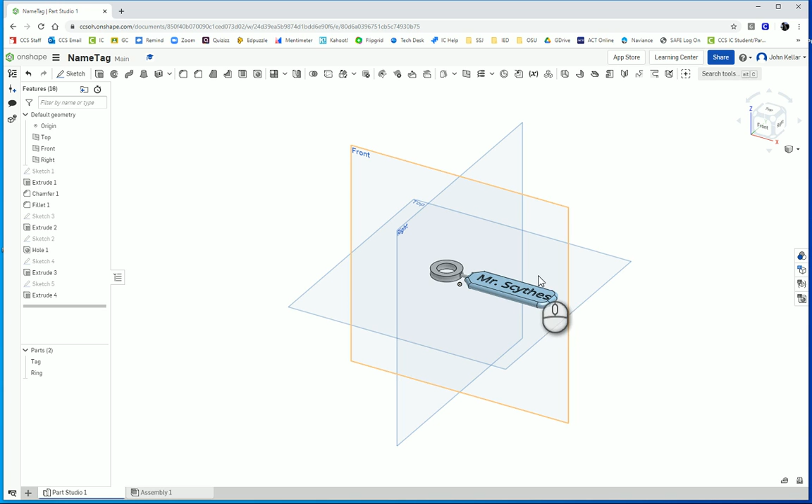Okay, we'd like to begin another episode of OnShape, and we're going to do a couple things in this nametag exercise. We're going to first learn how to do a feature fillet and a feature chamfer. We'll also learn how you can emboss or engrave text on a surface. And then we'll also learn how to use existing geometry on one part to design geometry for a separate part. And then finally, we'll also learn how to use the Revolute Mate to insert a cylinder into a hole.

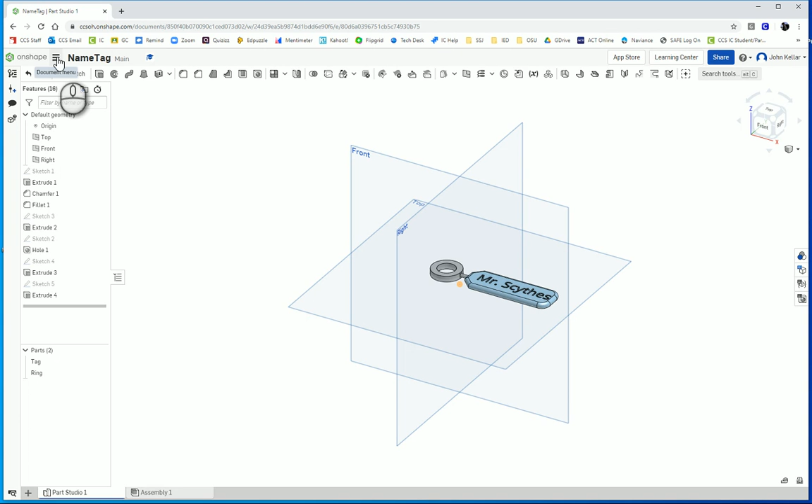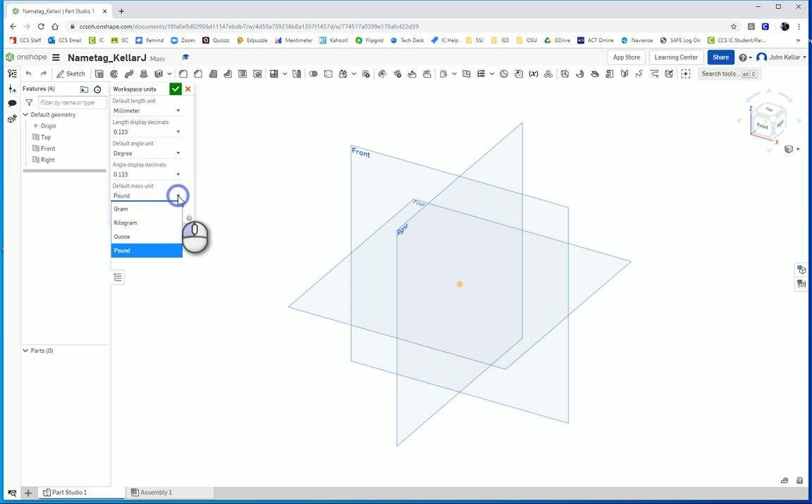So let's go to OnShape and go to your IED folder, and you're going to create a new document and call it Nametag underscore your last name, first initial. And since we're going to be working in millimeters, we should change our workspace units to millimeters. It's also helpful to change the mass units to match the same system, so grams or kilograms—this is a small piece, so grams are fine.

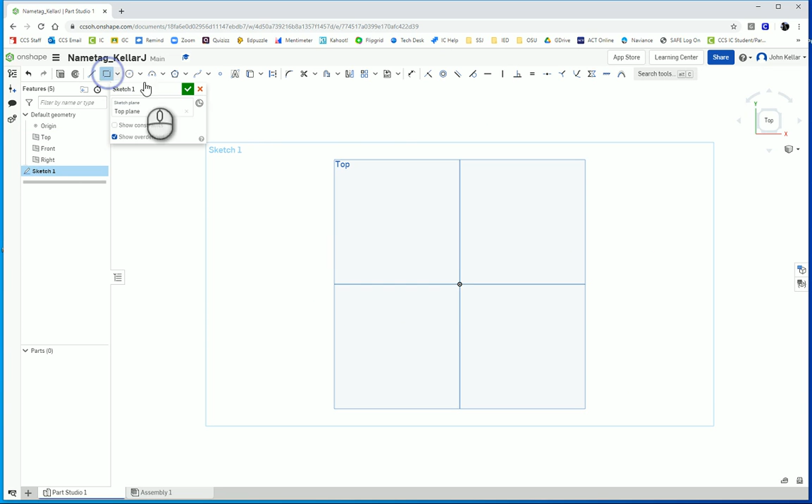Okay, so we are going to first start a sketch on the top plane. Now I'm going to use the default planes here a lot, so I'm going to click on the top plane here, and then I want to look straight at it. I'm going to grab a corner rectangle, attach it to the origin, and drag it up somewhere and click. Then we want 60 width, enter, 20 height. Okay, so there's our starting part.

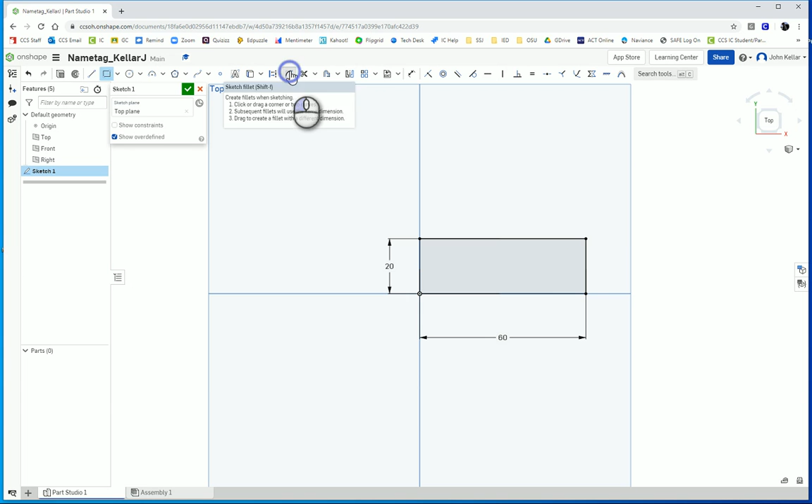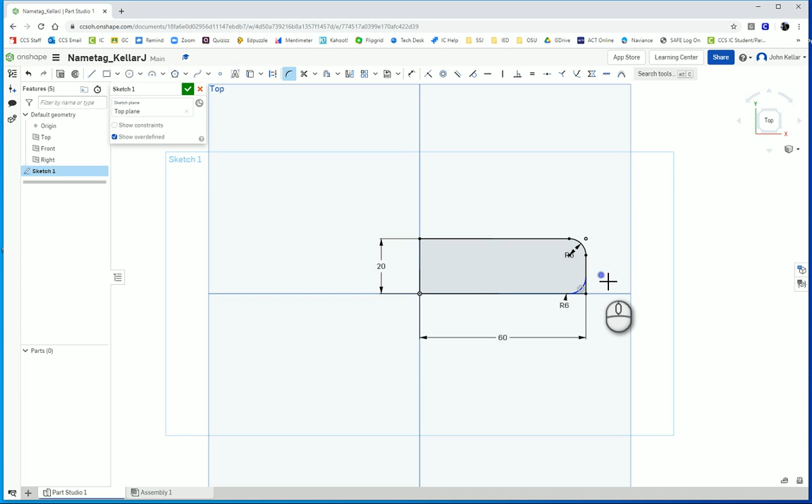The next step is we want to round off the two right side edges with a sketch fillet, which is right here next to the scissors. Click on the sketch fillet, and then I can highlight the point where that corner is. Click on that, and it applies it. It gives you a preview, and you click again to change the dimension, which is 6. Then the corner just below that—click again, and notice it uses the same dimension as you used on the previous one. So click and enter, and there's our fillet.

All right, finish that sketch, and now we need to extrude it. Okay, now I'm going to take a quick look from the side over here. You'll see why shortly.

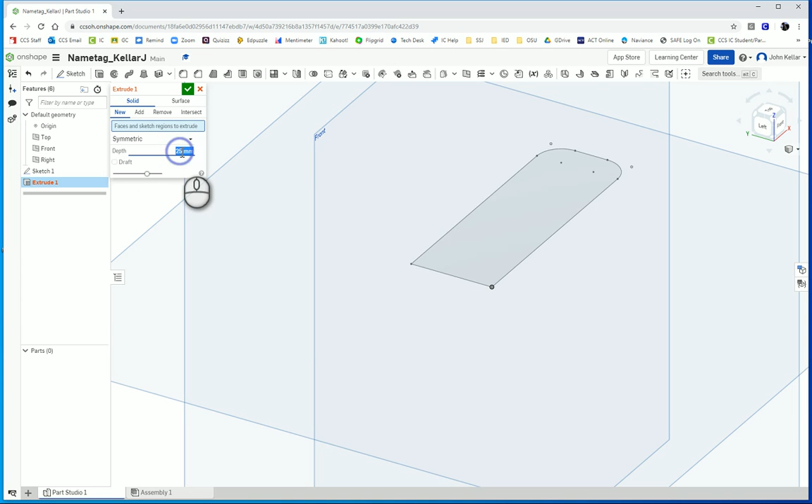We're going to do a symmetric extrude. Okay, this extrudes it above and below the plane. So 4 millimeters, and click on our sketch. Notice it extrudes half of that above and half of the 4 below. That's going to be important later on. Symmetric sketches are nice when you need a midline through showing through your part for later placement of geometry. Finish the sketch.

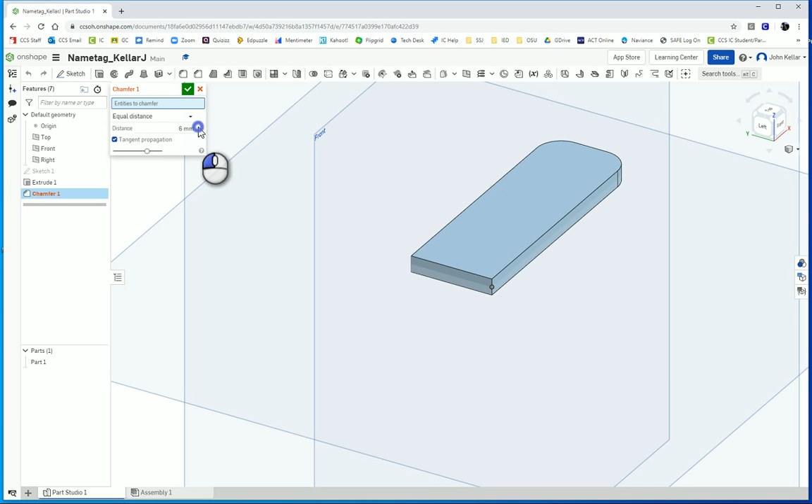Okay, so now we're looking at this side. Now the next step is we want to see how these corners here meet at 90-degree angles. That's kind of sharp. I'd like to shave those off with a chamfer. So I'm going to do a feature chamfer up here. Click on that, and I want equal distance, 6 millimeters. Then I just select this left edge—notice I highlight not the whole side, I want the left edge—and the right edge here. Notice it shaves them off. And green check mark.

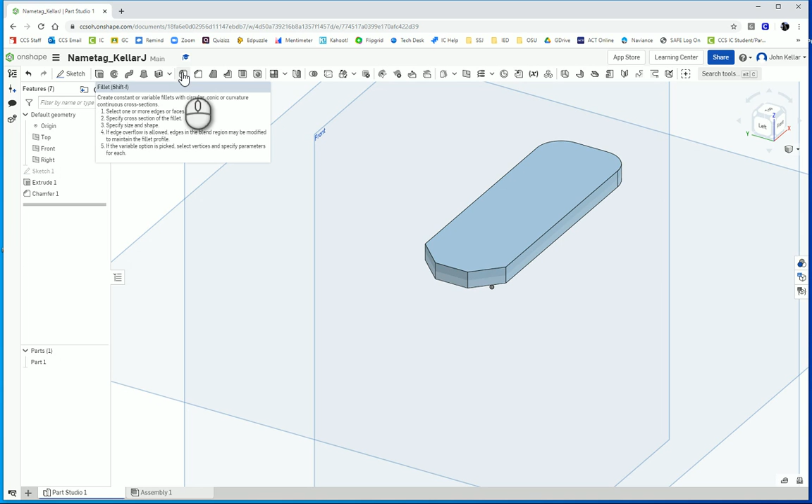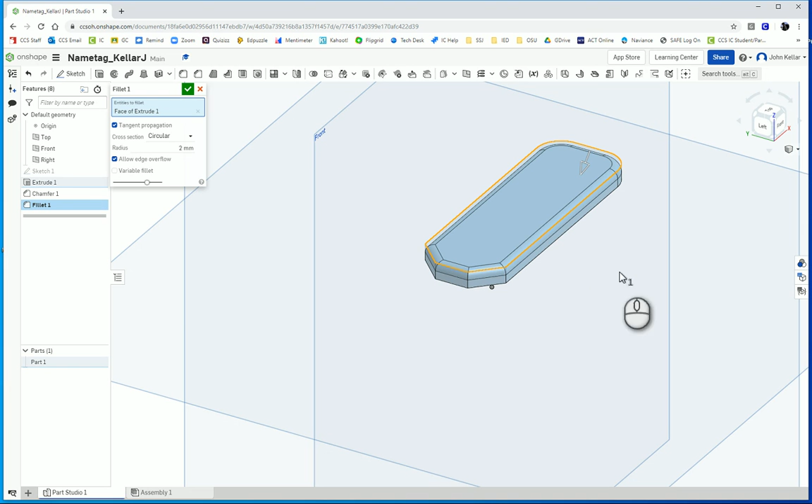Okay, next step. I'd like to round off all the edges around the top and all the edges around the bottom. Let's round that off to make it nice and smooth. So I'm going to choose a feature fillet this time, and I want the radius to be 2 millimeters, which is half of the thickness of this part, and you'll see why shortly. So I could select each individual edge, but that would take a while if I just wanted to do all the edges all around. Instead I can move my mouse over the top and notice all the edges get highlighted. If I click, they all get automatically rounded off. I also need to do that to the bottom, so I'm going to switch to the isometric view of the bottom here, zoom back in, move my mouse over the bottom face, and boom, it rounds it off. All right, so finish that.

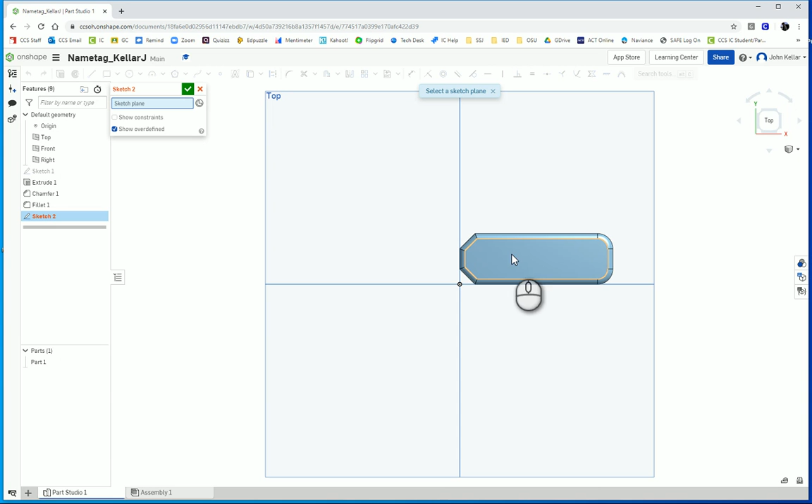Okay, and let's look at the top here. So the next step is I'm going to put a sketch on the surface of this top surface of my extrusion.

Make sure it says face of extrude 1 here. If it says top plane, click the little X to delete that and replace it, and select the top face of your extrusion here.

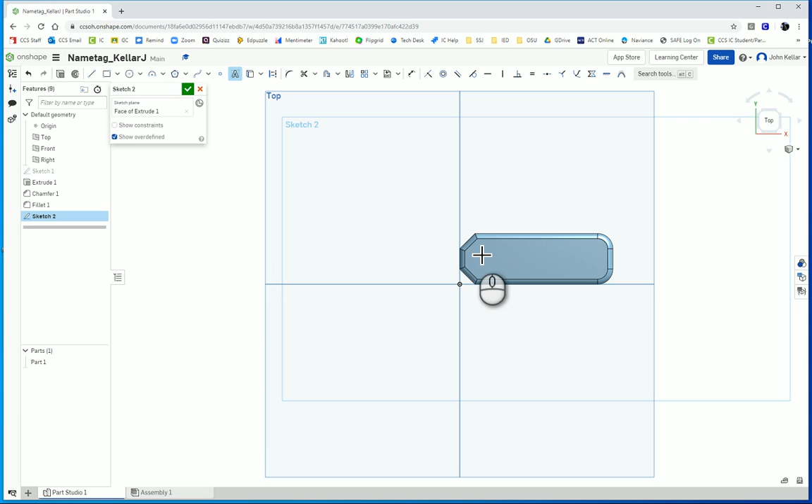Now to place text, I'm going to choose a text box and place it so that it fills up some of this space. Make sure you don't snap it to anything yet. We can adjust the size later and type in something short. There are other fonts to explore here if you want, and other options that you can play with.

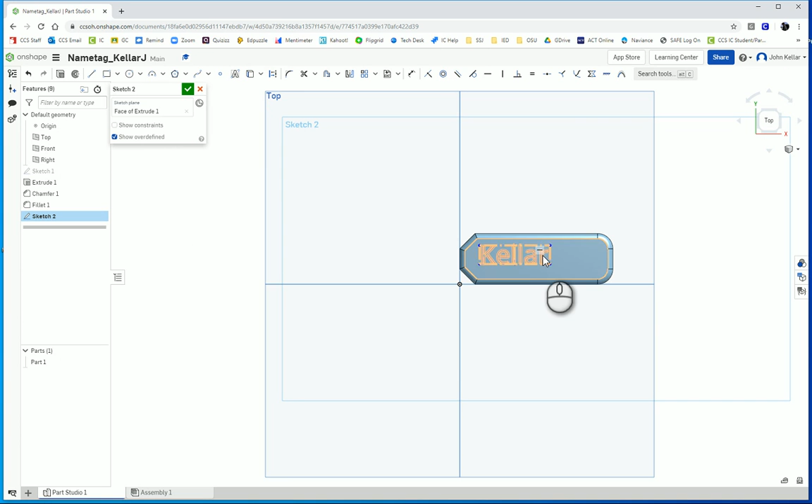All right, there we are. And that's a little bit small, so I'm going to coincident this right edge of the text box with the right edge of the top face before it curves down. So there, then press escape, and that will let me stretch this out a little bit.

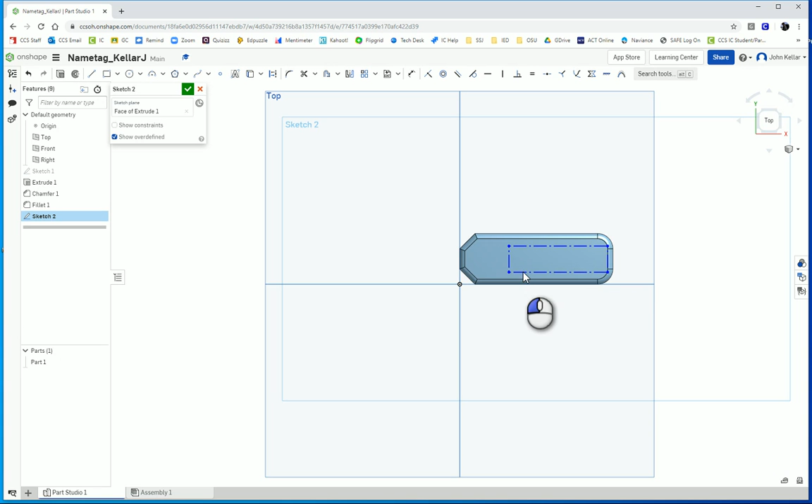I'm going to move it down, kind of center it. And yeah, that still fits. You always got to check to make sure your letters still fit there. And don't protrude off over onto the fillet. Yeah, that's good enough. I'm going to finish my sketch.

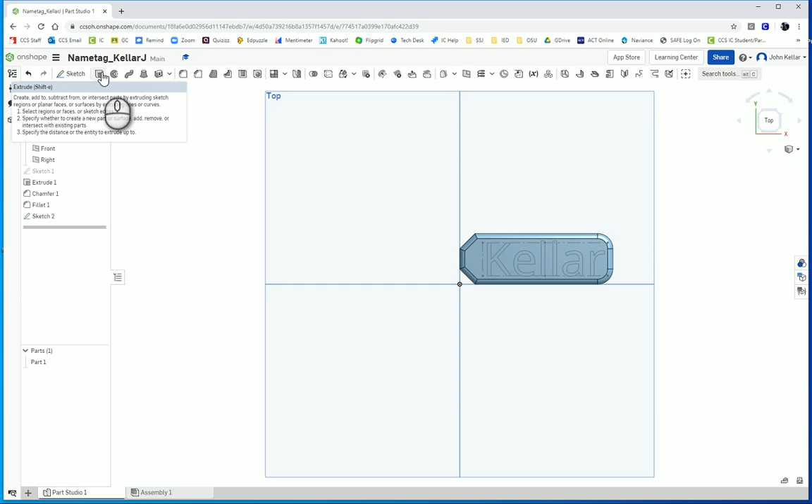Then to emboss or engrave your name, emboss would be to raise it up, engrave would be to cut it out of the surface.

Choose an extrude, and I want to blind extrude to a depth of 0.8 millimeters, and I want to remove - make sure you select the remove option. Then highlight your sketch so that all the letters in your name are highlighted.

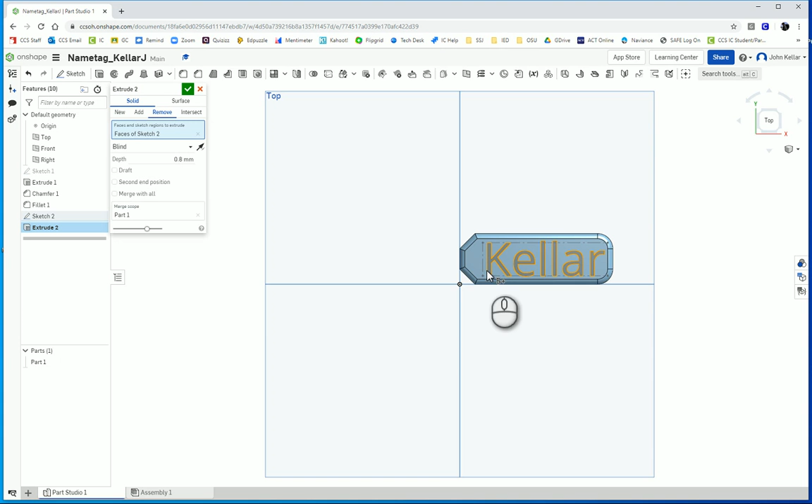And boom. If you did it right, that will show up on the surface. If you accidentally selected the top plane for your sketch surface and not the top of your extrusion, you wouldn't see your letters - they'd effectively be inside your name tag. All right, so there's the letters.

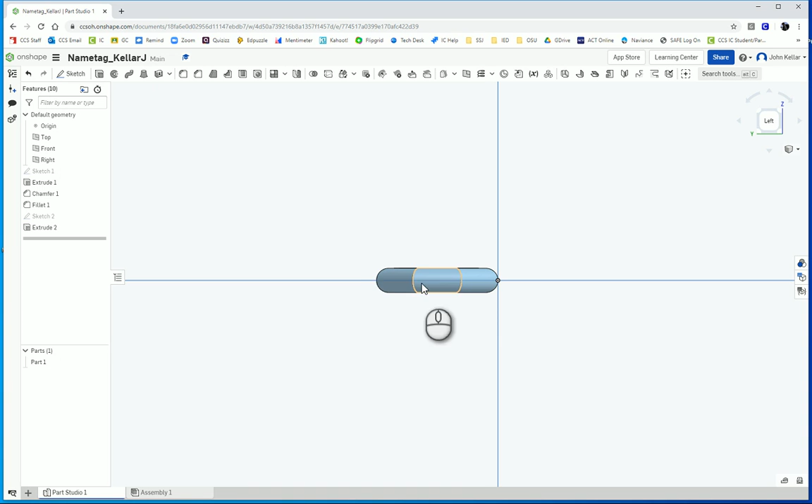Next step, we need to put a little hole on the edge over here. So I'm going to switch over to the left view in my navigation cube and zoom in. Notice this X-plane goes right through the middle of my part because of that symmetric extrusion.

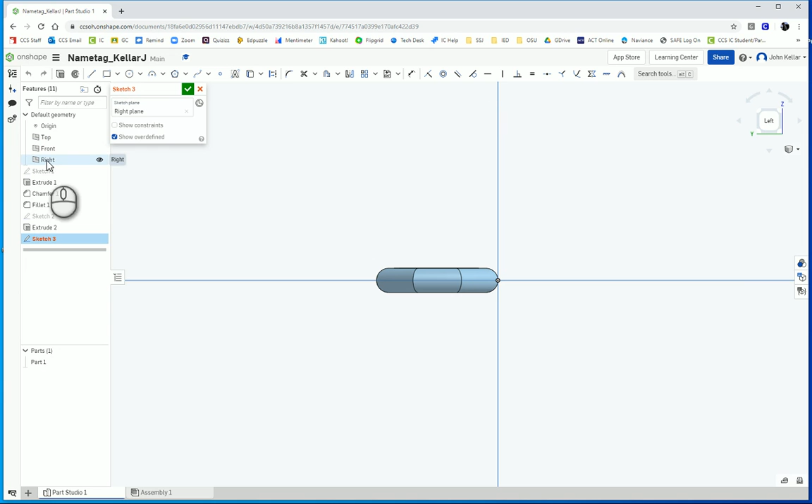That's going to be handy now, because when we place a point for our hole, we can line it up easily with our origin - that's why we did that symmetric. So I'm going to start a new sketch and select the right plane from the default plane list. That's the plane at the end of the part, and I'm going to select the point tool, which is right next to the text tool.

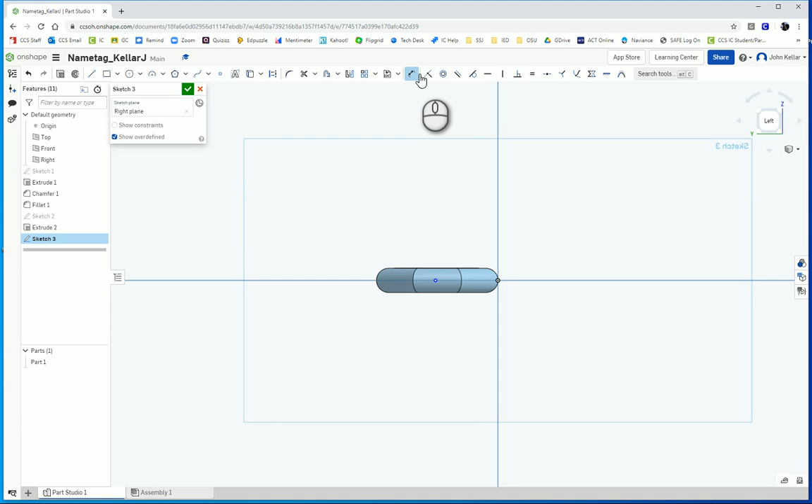Move my mouse so I get a little dotted line from the origin and place my point somewhere here in the middle. Don't attach it to one of the edges - make sure you click it right there somewhere in the middle, and then we need to dimension that. So I'm going to select the dimension tool, and I want the point to the far left edge so that it's in the middle. The whole thing is 20, so right in the middle would be 10.

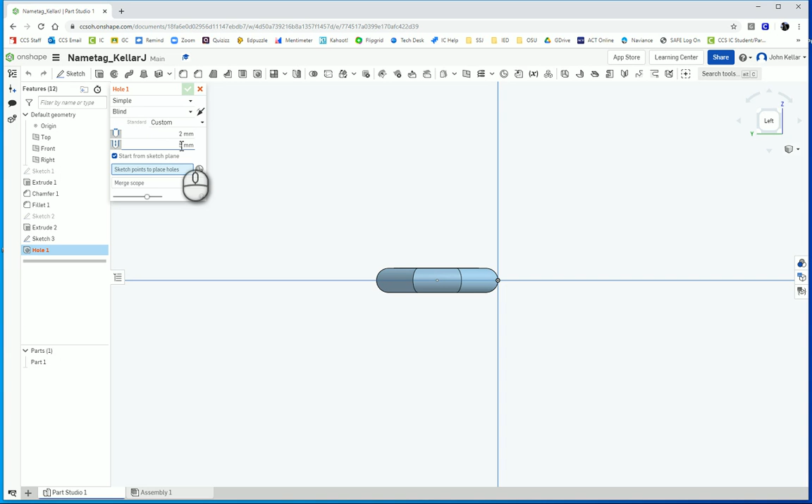All right, then finish my sketch, and I'm going to select the hole tool and make sure it's a simple blind 2 millimeter diameter, 5 millimeter deep hole. Start from the sketch plane, then select the point you just made for your hole. And boom, you see a little hole appear there. If you turn your part, you can see that it actually goes into your part.

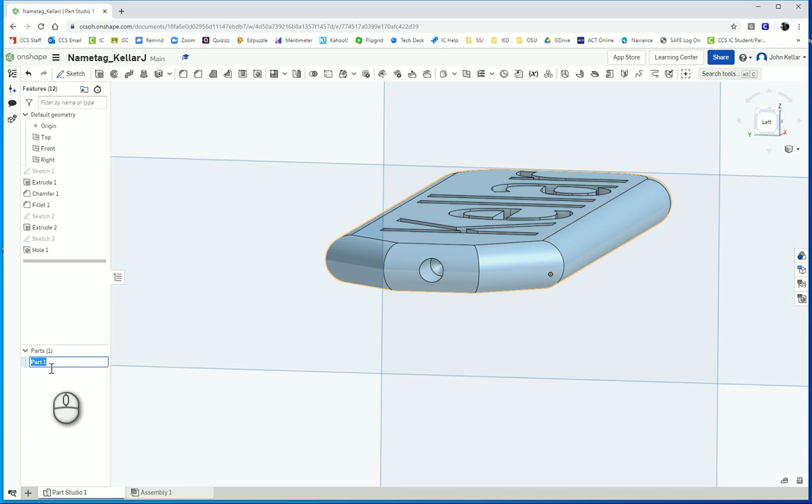All right, okay, so that's that, and that finishes the tag part. So let's change the name of part 1, rename it to tag.

Now the next step is we need to build the pin and the ring that attach in this hole. So that's going to be a separate part, but I want it to match the size of this hole. So in order to use that geometry, I need to project that circle onto a new sketch.

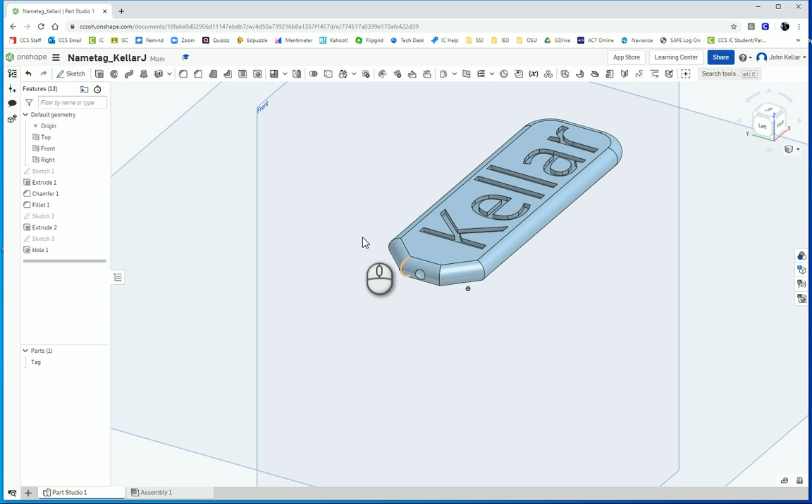So I'm going to start a new sketch, select the right plane again, zoom in, and now I'm going to get the use or project convert tool. It's right up here next to the text tool. So all the tools we've used so far are pretty much right around the same spot.

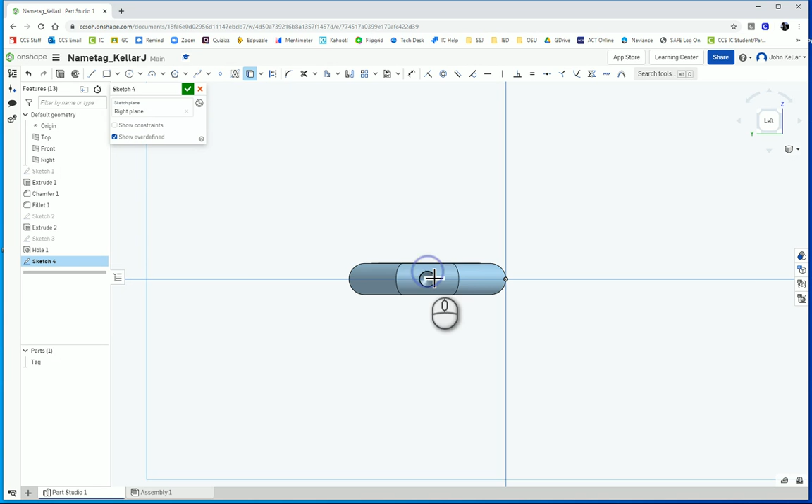And then highlight the circle. See how it's all highlighted in yellow, and click it. Now you see a dark black circle, a thick black circle appear on your sketch. You can finish that.

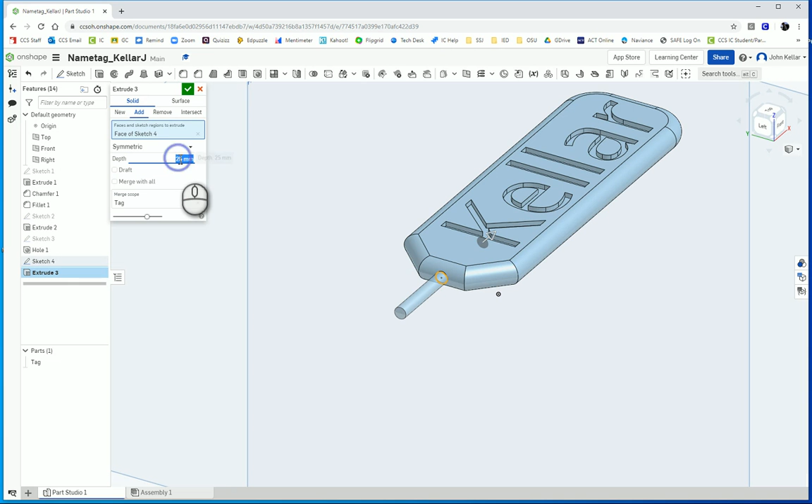Okay, switch out to an isometric view here again. You'll see why shortly. I'm going to choose an extrusion. Select this hole, and I want a symmetric extrusion of 10 millimeters. So 5 will go into the part, which matches the depth of the hole, and 5 will stick out. And I want a new part. Make sure you select new as well. Okay, that will create a new part down here that is related to this part.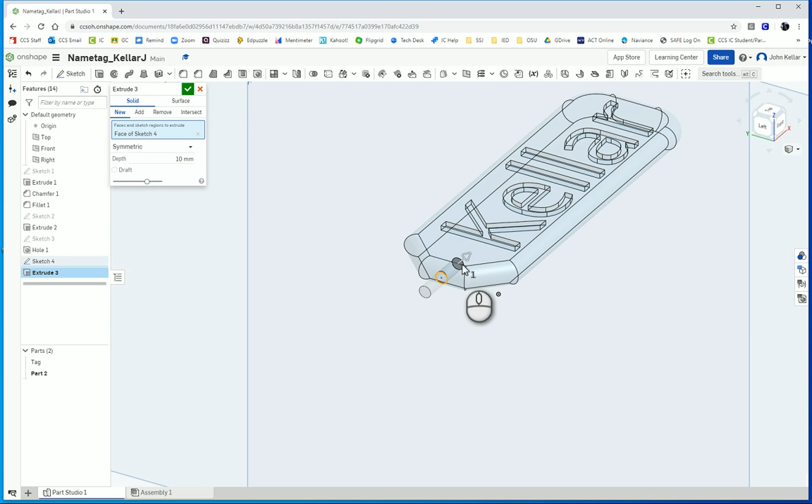Now, if you wanted to see inside, you could select over here in the view cube translucent, and you could see how far your part extends into the name tag. That's handy sometimes to see if this is going to interfere. If your hole's longer, you can see if it interferes with any of your letters that you extruded down, and you can switch back to shaded. Okay, so this is good.

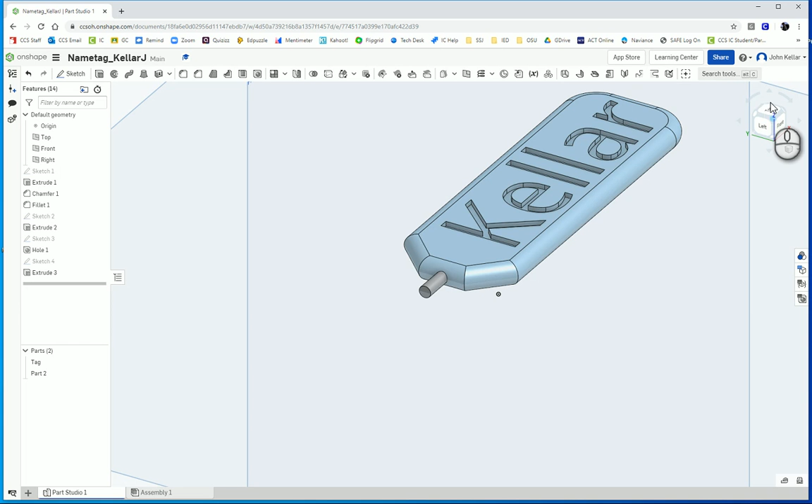All right, so now we've got our part here. We want to build a ring at the end, so I'm going to switch in the navigation to the top view, zoom in, and I'm going to start a new sketch on the top plane again.

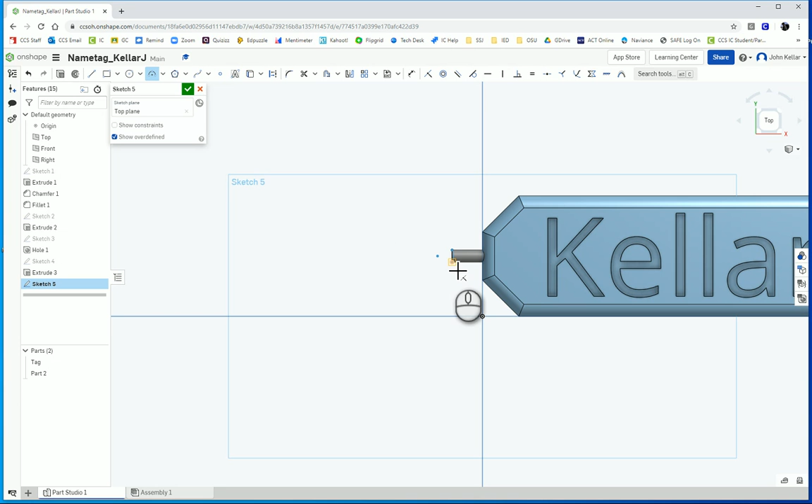And I want to project the edge of this pin onto my sketch because I'm going to use that line as an edge. So I'm going to project that edge, and I'm going to grab a 3-point arc and attach it to either end of that and drag it out to make my ring shape. And then my radius, I'm going to type in 10 so that it matches the width of my name tag. All right, so there we go.

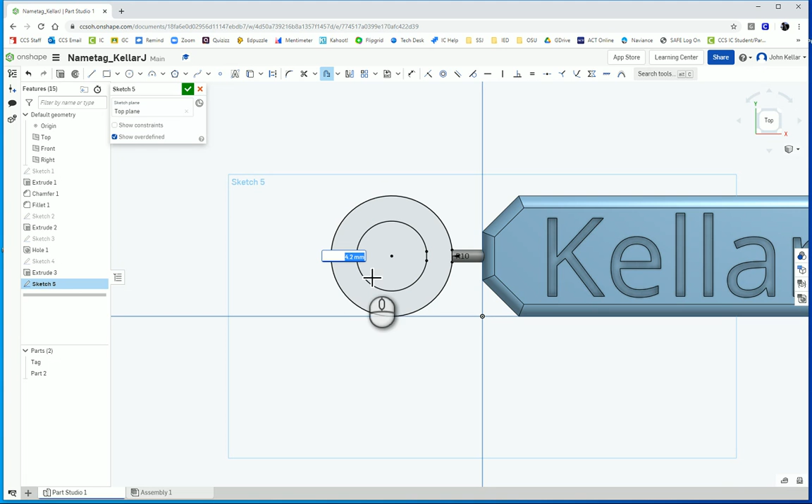And then the next thing is I'm going to project this ring inside. So I'm going to select the project or offset tool, offset. Click on the ring and the flat part that I projected. And I don't want it to go outside, I want it to go inside. So I'm going to drag this arrow inside instead. And then click to place and type in 4 millimeters. I want it to be offset by 4 millimeters. Finish that sketch.

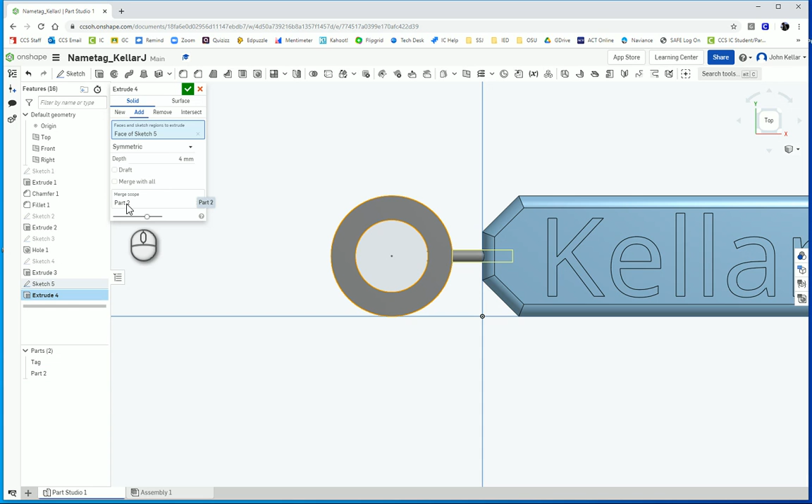And extrude. I want a symmetric extrusion, the same depth as my name tag, which is 4. And I want to add it. I don't want a new one. I want to add it to part 2. So make sure its merge scope is part 2. All right, so it's going to attach to part 2 and check. And now if you look over here, you can see it's the same depth as that and it's centered on the pin. All right, and we're going to rename part 2 ring.

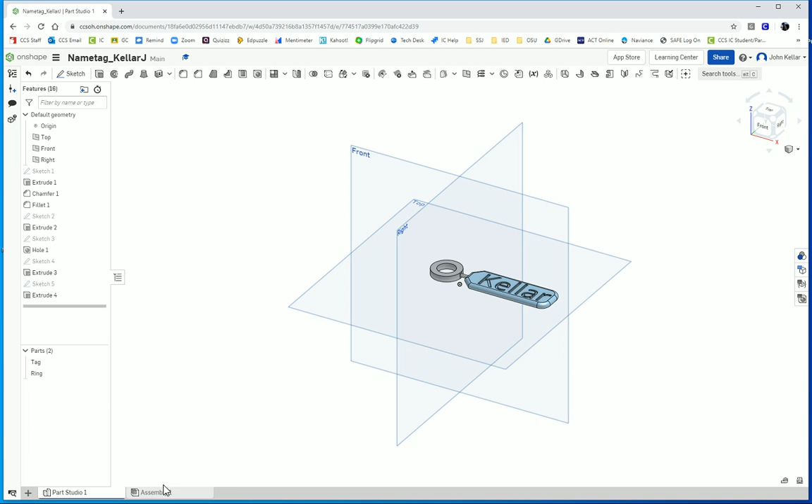Okay, so now it looks like it's together, but we haven't actually assembled it together. If we go to the assembly and insert, which we need to do now, we're going to insert the ring and the tag, and we need to place these somewhere. So let's place them and then check. And then notice if you grab the ring, it moves separately from the tag. So we still need to mate these.

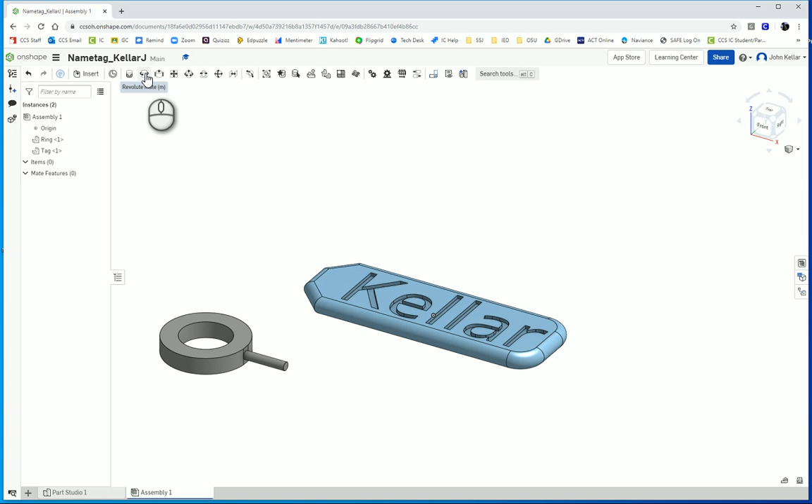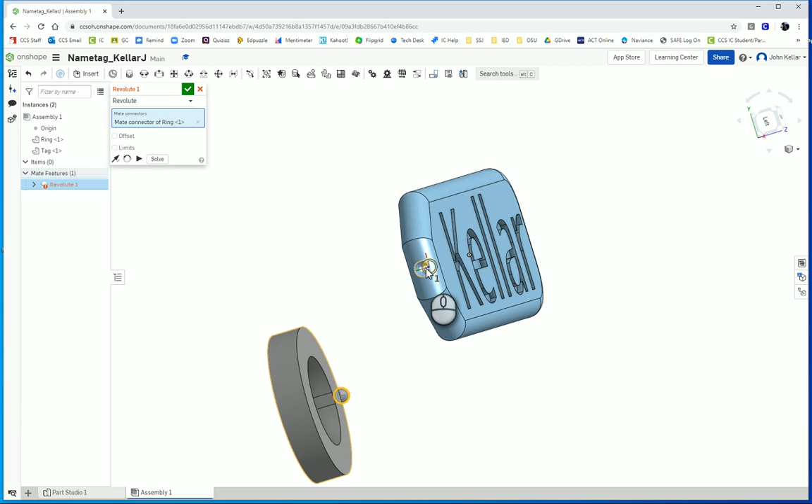So I'm going to select the Revolute Mate or Revolute right here. And the way this works is it attaches whatever circular end you select, which I'm going to select the end of my ring, to whatever circular surface you select. Now make sure that this isn't the end of the hole. We don't want the end of the hole. We want the bottom of the hole. So make sure you notice how my part moves within that hole. I want the bottom of that hole. So I'm going to select that and then green check mark up here.

And if I check now, if I grab my name tag, notice the ring moves with it, so they are now mated. And that is the end of our name tag exercise.